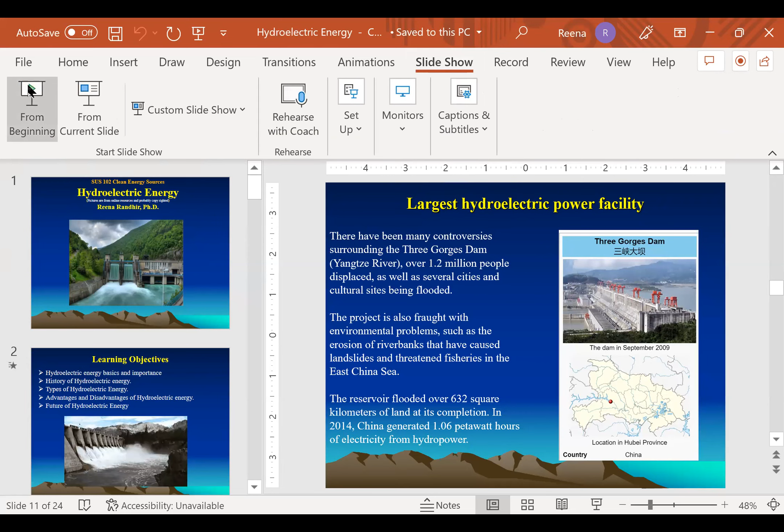Hello, everyone. Our objective today is to understand the importance of hydroelectric energy in the world. So the main learning objectives are to understand the basics of hydropower and its importance, a very brief history. We'll go over the different types of hydroelectric energy, the advantages and disadvantages, and also a brief overview of the hydroelectric energy.

What is hydropower or hydroelectric power? Hydro means water. So it is a form of renewable energy that uses water that is stored in a dam, or it can also be a flowing river that is used to create electricity that will be put in the electric grid. So this facility is called a hydropower plant.

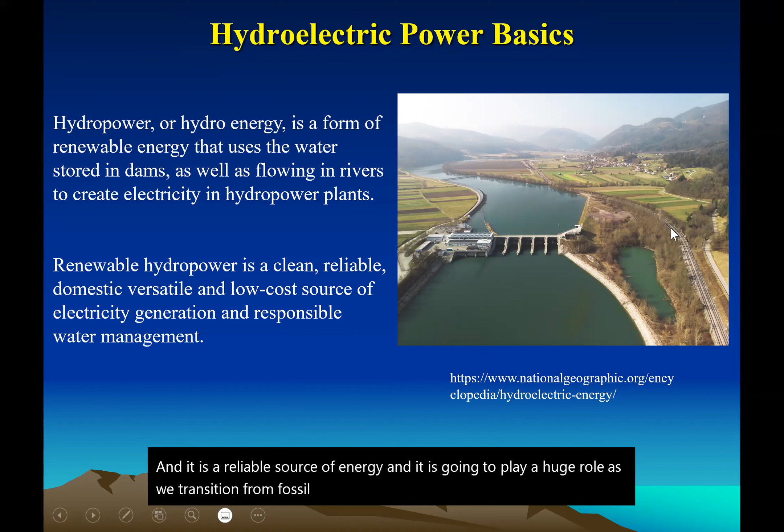Its significance is that it is very clean, reliable, it's domestic, versatile, and it is a reliable source of energy. And it is going to play a huge role as we transition from fossil fuels to clean energy fuels in the future to combat the climate crisis.

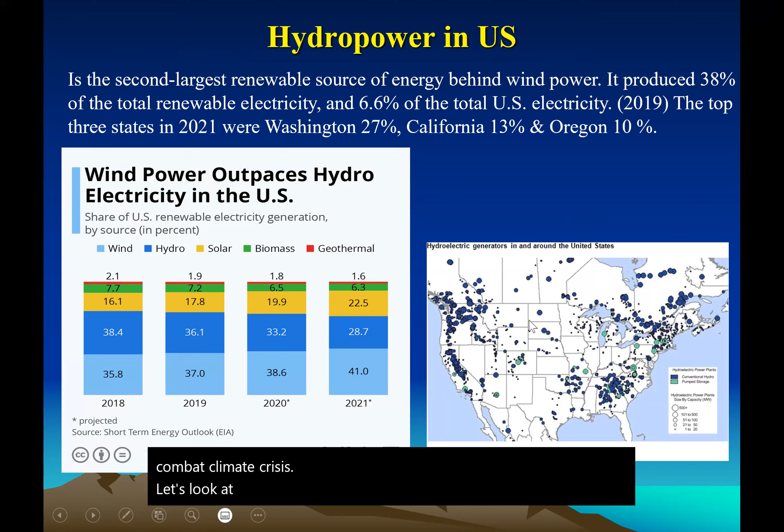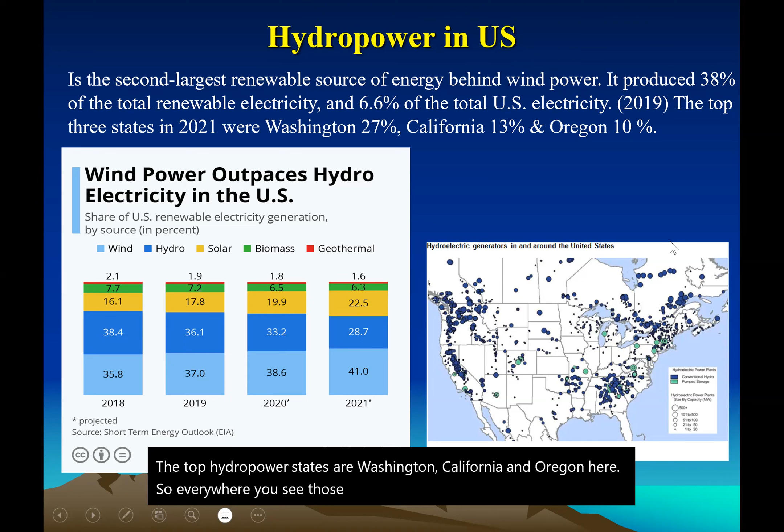Let's look at hydropower in the United States. In the USA, it is the second largest. Hydropower used to be the first 4 years ago; 38% of the renewable energy came from hydropower, but wind energy has recently taken over. So it produced about 38% of the total renewable electricity and 6% of the total US electricity. The top hydropower states are Washington, California, and Oregon here. So everywhere you see those blue bubbles is where hydropower is being made.

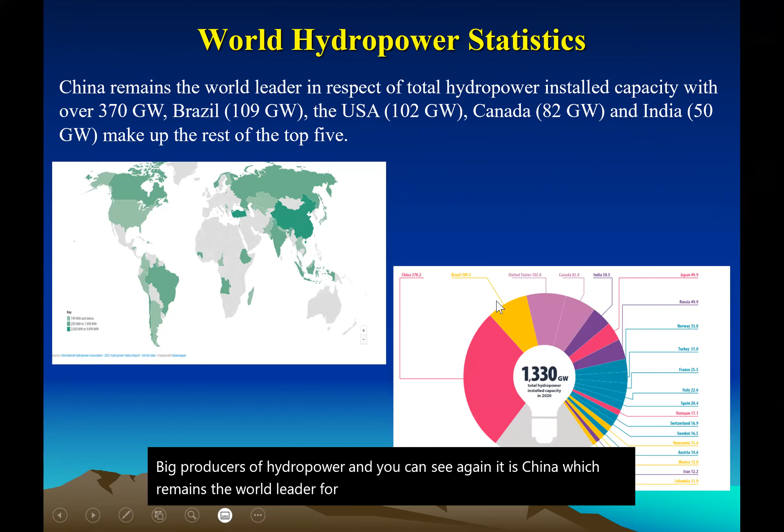In the world scene, all the countries that are shown in dark green are big producers of hydropower. And you can see again, it is China, which remains the world leader for installed capacity, followed by Brazil, USA, Canada, and India. You can see it in this pie chart here.

A brief history about hydropower. Water power has been used for thousands of years. The Greeks used it for grinding wheat into flour. In the 1700s, it was used for milling lumber and for pumping irrigation water. In 1878, the world's first hydroelectric power was developed by William Armstrong in England. In the USA, Appleton, Wisconsin became the first operational hydroelectric generation, producing 12.5 kilowatts that can feed up to 250 lights.

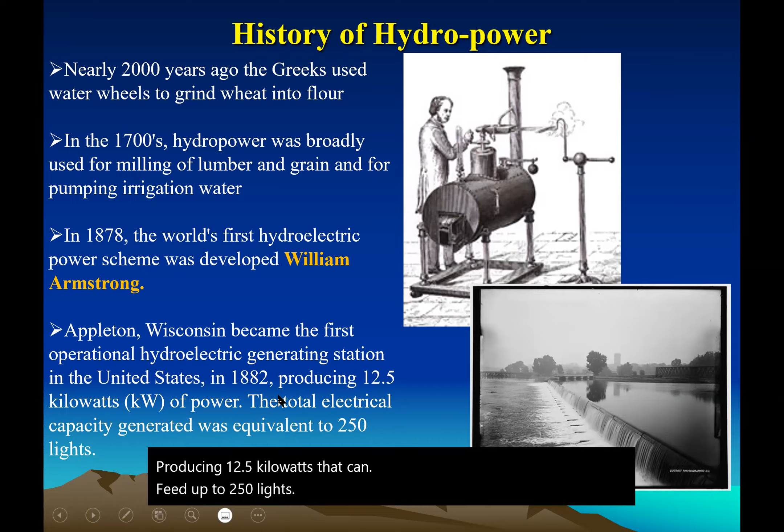So we call hydropower very renewable, sustainable and clean because it is dependent on the water cycle, which is natural. And the water cycle goes on and on. Here in this depiction, you can see how the sun propels the water cycle. So there's water evaporation from all the water bodies like lakes, rivers and oceans. And there's also transpiration, which is water loss from plants.

They condense around particles in the atmosphere. And when conditions are right, they come down as rain, precipitation, which can be stored, and the energy in water can be used to create electricity. So because the water cycle is very predictable and dependable, you can also say that the production is reliable, and it's also domestic.

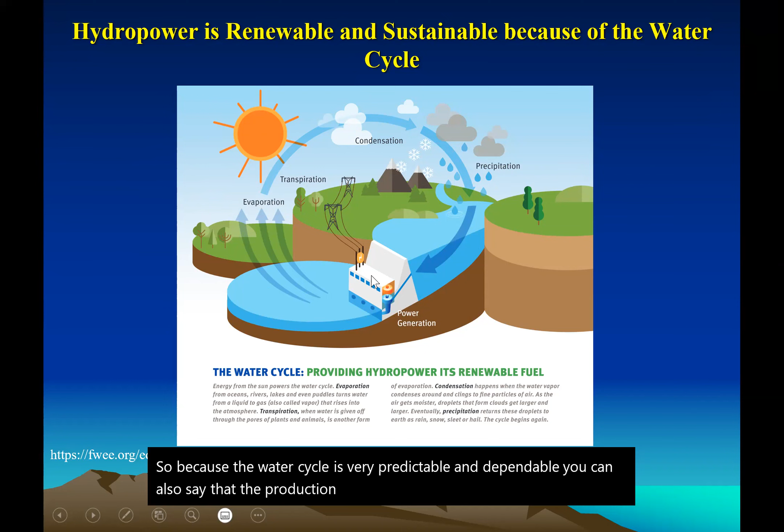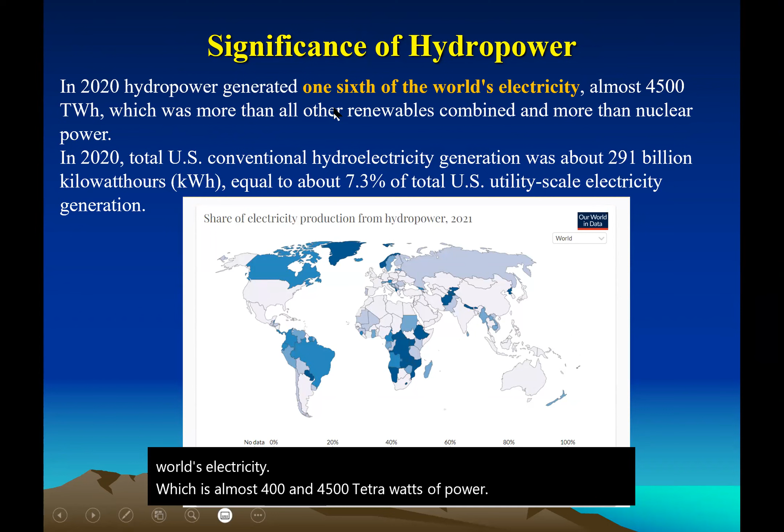So the main significance of hydropower is that in 2020, it produced a sixth of the world's electricity, almost 4,500 terawatt-hours, which is more than all the other renewable energy combined, and even more than nuclear. And here in the USA, it equals 7.3% of the total US energy generation. So this is very significant.

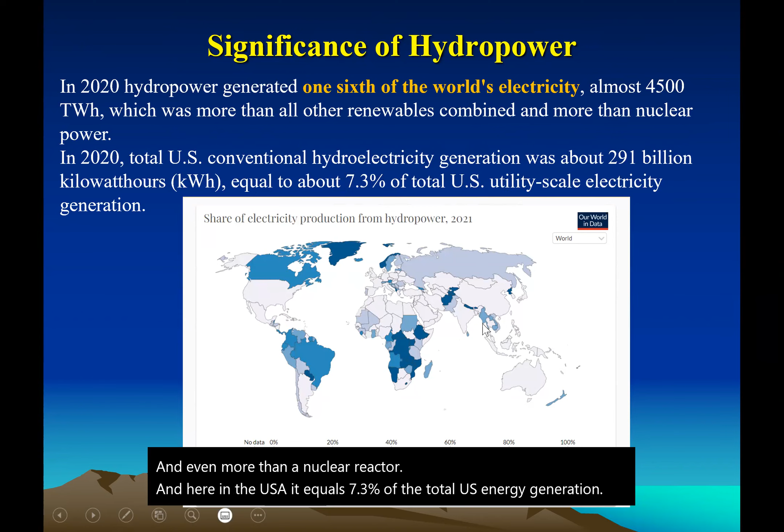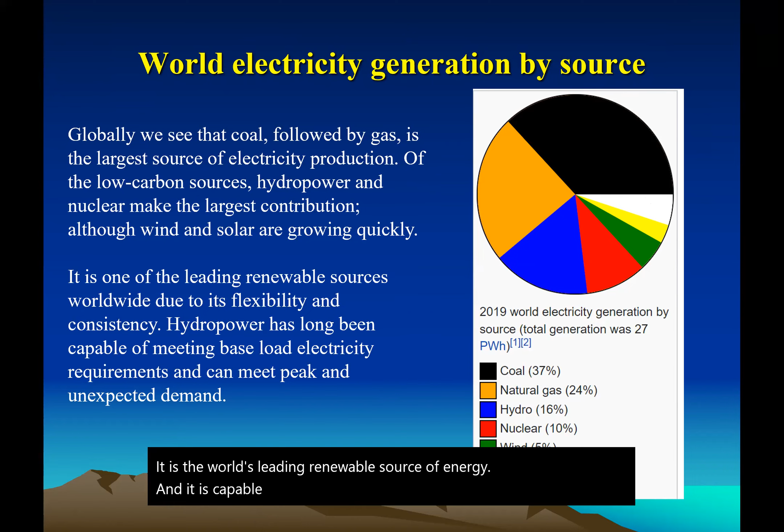So if you look at the world's generation of electricity by source, you can see the black region in the pie chart is coal, followed by natural gas, and here is hydropower, which is very commendable, at 16%. It is the world's leading renewable source of energy. And it is capable of meeting base load energy requirements.

However, there was a lot of controversy with this dam when it was built, because anytime you build a dam, you have to displace a lot of people. So this dam displaced over 1.2 million people. So several cities are actually buried here, drowned under the water. And there's also a lot of environmental problems that came into focus after this. It led to sedimentation and landslides in the area, apart from disrupting the ecology, the fisheries of the region.

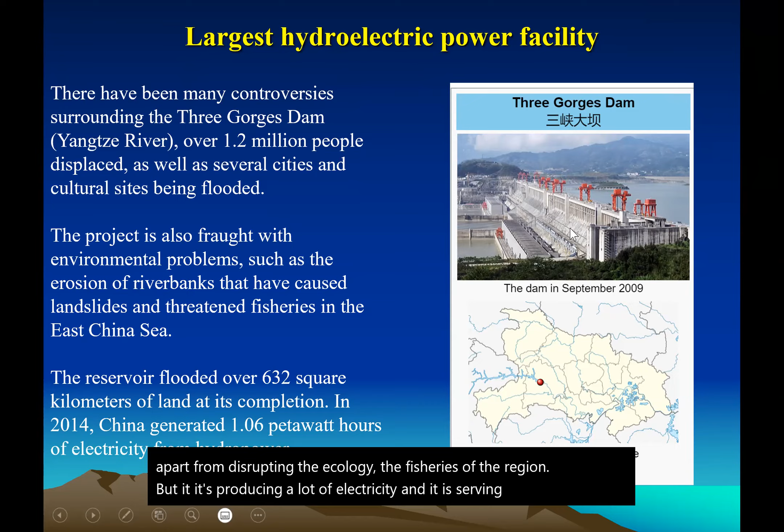And let's look at the physics of hydroelectric power. So any water, like stored water in a dam, has potential energy. And when it drops from a height, mainly because of gravity, sometimes we pump also. When it drops, it is converted to kinetic energy. And when it pushes the blade in a turbine, it becomes mechanical energy. And then the generator converts it to electrical energy. Very simple. Overall, the physics is very simple.

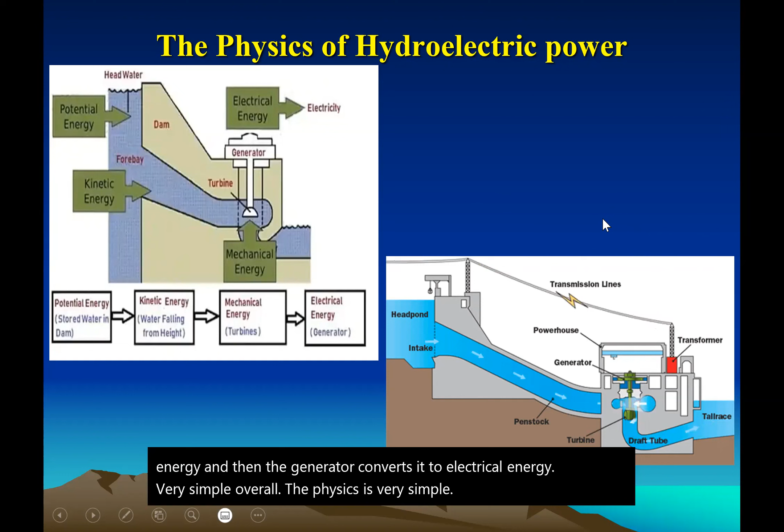So let's see how a hydroelectric power plant works. So here is a reservoir. We call it a dam where water is stored. Sometimes it's close to a natural dam, and many a time it is man-made. So this is where the cost is. It's very expensive to build a dam. And it can disrupt the normal human population and the wildlife population.

So when they open a gate, the water is going to move through a penstock, which is a tube that carries water to the turbines. So here, this is where it becomes kinetic energy. The turbine blades are turned by the force of the water, and it is rotating the turbines. The shaft here that goes to the generator will make electricity. And then the electricity is led to the electric grid here, and then it goes to power homes.

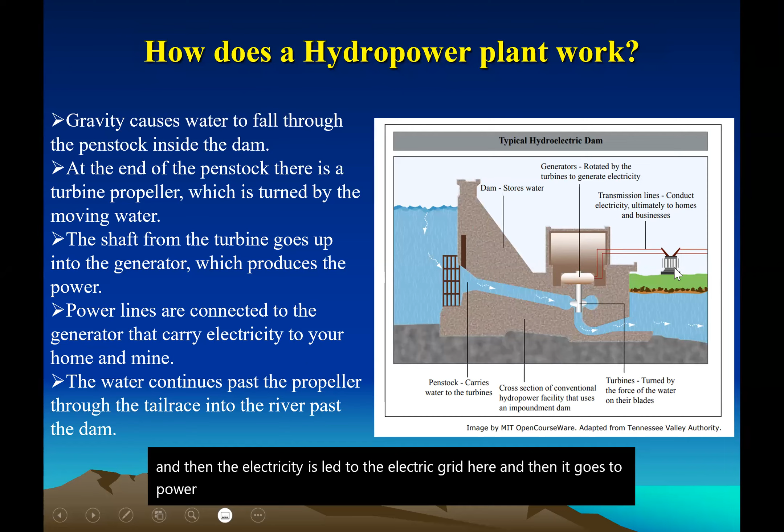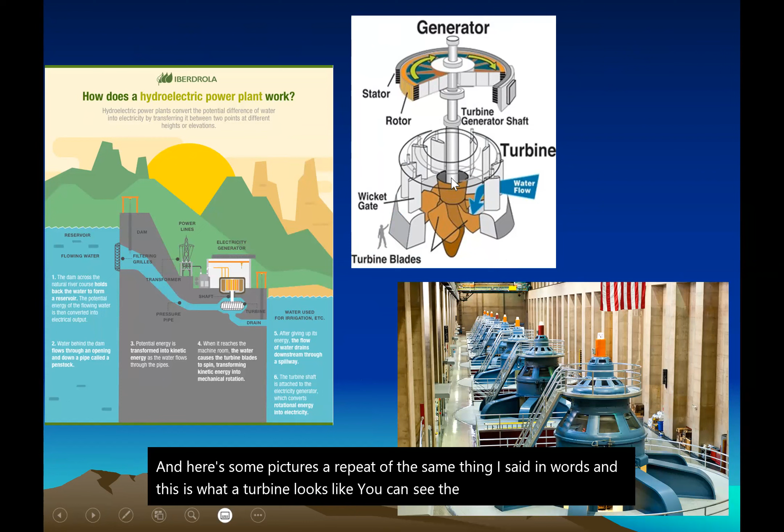And here's some pictures, a repeat of the same thing I said in words. And this is what a turbine looks like. You can see the turbine blades that will turn the shaft, and then the rotor and stator of the generator to produce electricity. And this is what it looks like from the outside. They're massive. So this looks like a huge dam.

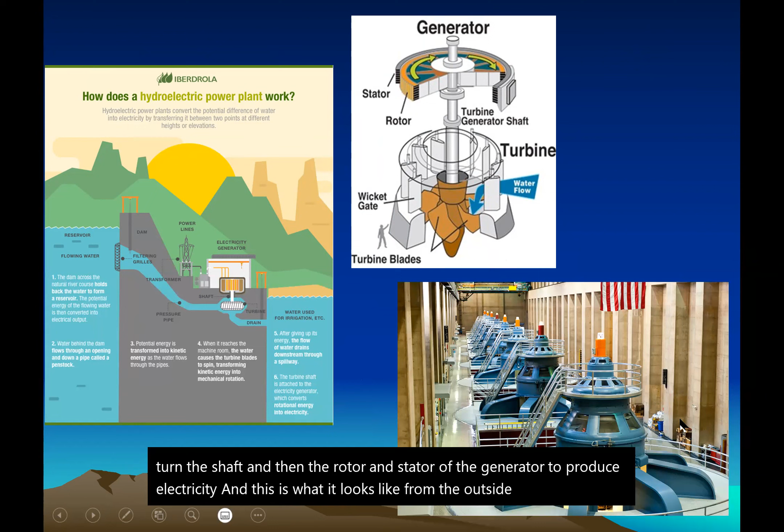So there are three types of hydroelectric power. It is classified based on installation capacity and the working head. When they say working head, they're talking about the height difference between the river flow and the outflow. So in a low head, the water head is below 30 meters. Medium head is 30 to 300 meters. And high head is 300 meters or higher. So the larger the working head, the larger the electricity generation. When water falls from a height, it has more power, thereby generating more electricity.

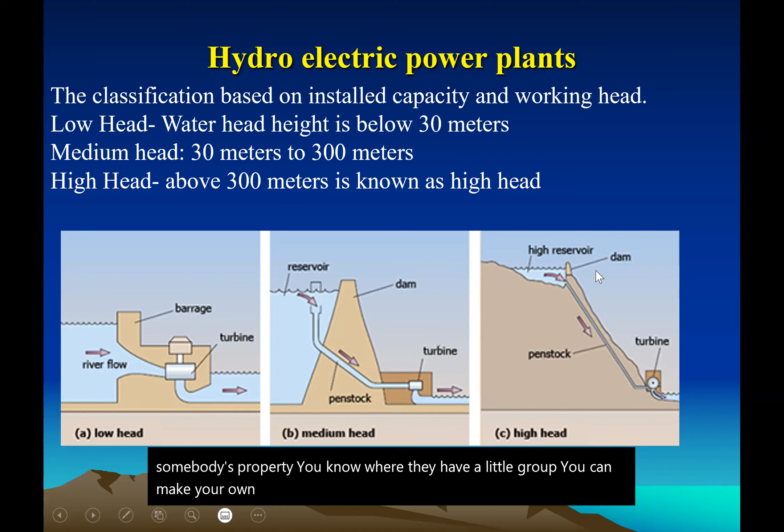So let's look at the three types of hydroelectric power. The first one is called impoundment. It's a reservoir. So here they have artificially created a reservoir. This is very useful when there is a topography like hills and mountains across the flow of the river. So here, we are using a dam with a reservoir, and they will open the control gate, and water will flow down the penstock to turn the blades in the turbine to make the electricity.

But when you think of a dam, it also plays a huge role in flood control, and recreation, and most times they have a fish ladder so that the fish can still migrate without affecting their migratory patterns. So this is called an impoundment. And this is capable of producing tremendous amounts of electricity.

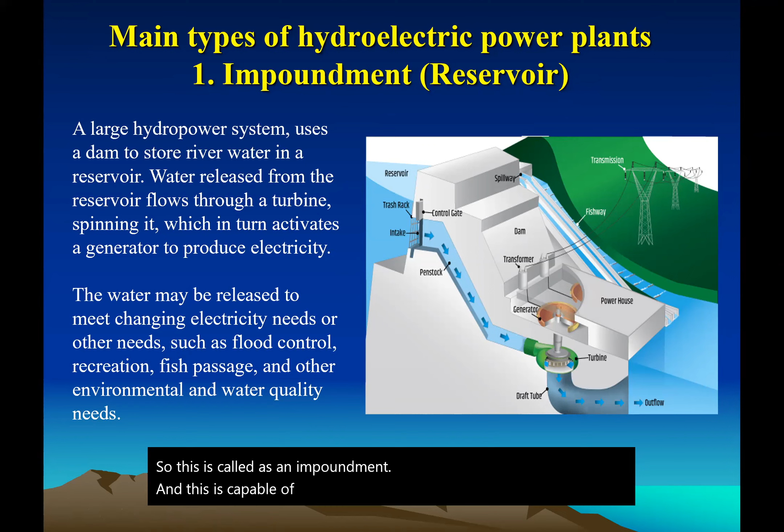The second one is diversion or run-of-river hydropower. So here we have a natural river. Because it's already flowing, there is a lot of kinetic energy here. So here we have a facility that will channel a portion of the river through a canal. You can compare it to a penstock that will turn the blades in a turbine, thereby creating electricity.

Sometimes the diversion is required. There are examples of where there's no diversion. So we are using the natural flow of river water, and we've created a facility in order to harness the kinetic energy of water.

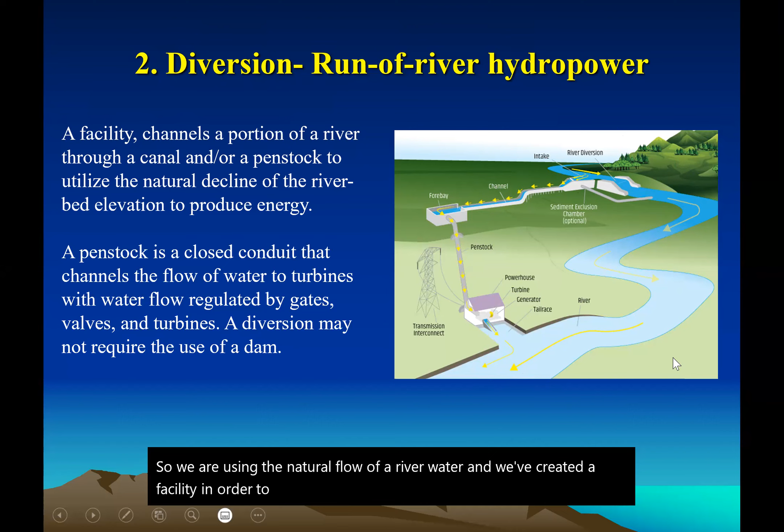It is projected this model is going to be the future, which is pump storage. So you can see it goes hand in hand with wind energy and solar energy. And you can see the PSH facility, pump storage hydropower. It can store electricity generated by solar energy, wind energy, even nuclear energy.

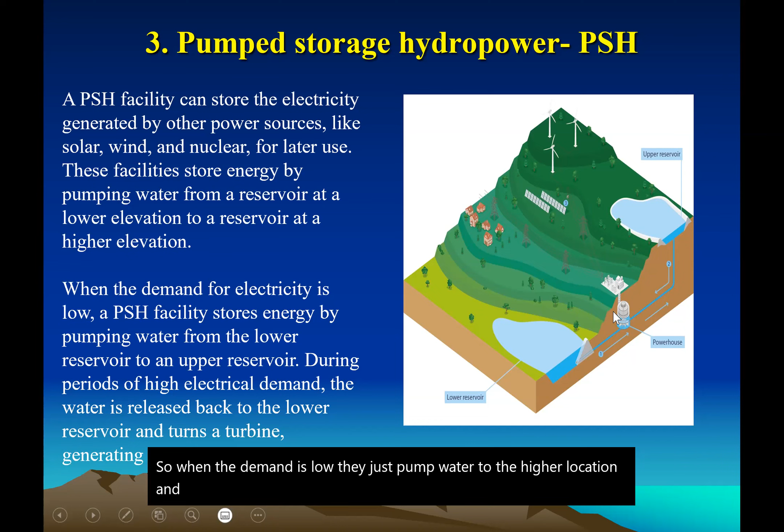And that energy can be used to pump water from a lower elevation to a higher elevation. It's called a lower reservoir to an upper reservoir. And depending on demand, they will open the penstock and generate more electricity. So when the demand is low, they just pump water to the higher location. And when demand is high, they will create electricity by opening the gates.

And here's the different sizes of dam. There's these massive, large hydropower. Department of Energy defines large hydropower plants with a capacity of more than 30 megawatts. And there's these little backyard ones, that's enough to power maybe a farm. So that's less than 100 kilowatts. No, this is small, that can power a community. And the micro is the one you can find in farms, like a private one.

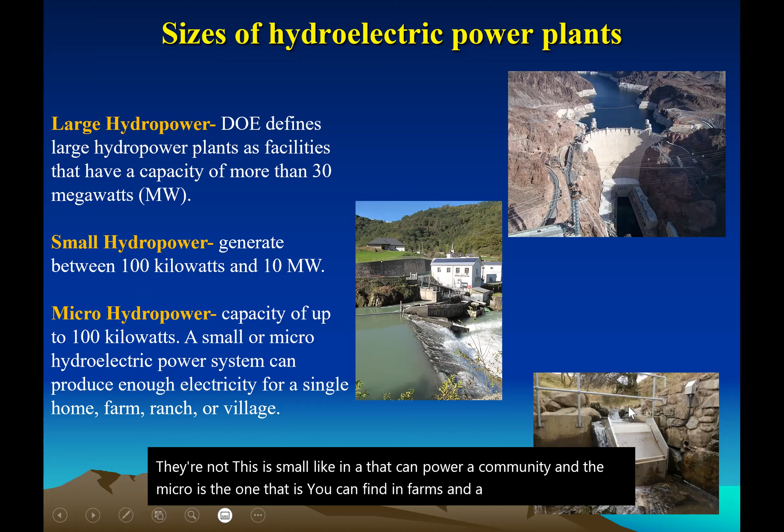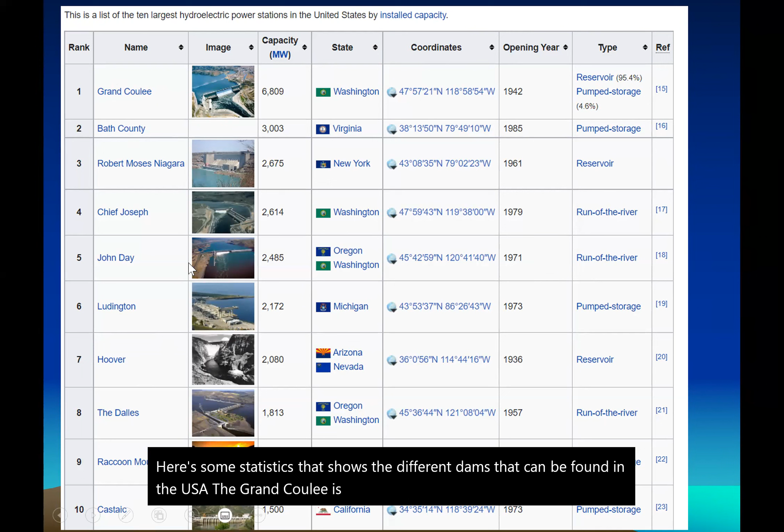Here's some statistics that show the different dams that can be found in the USA. The Grand Coulee is a famous one, and the Hoover Dam that was built in 1936. It's a very popular dam, and it's talking about the capacity and also the type of reservoirs. And by now you know what an impoundment or a reservoir is, what pump storage is, and what run-of-the-river is. So here this graph depicts the different types of dams that you can find.

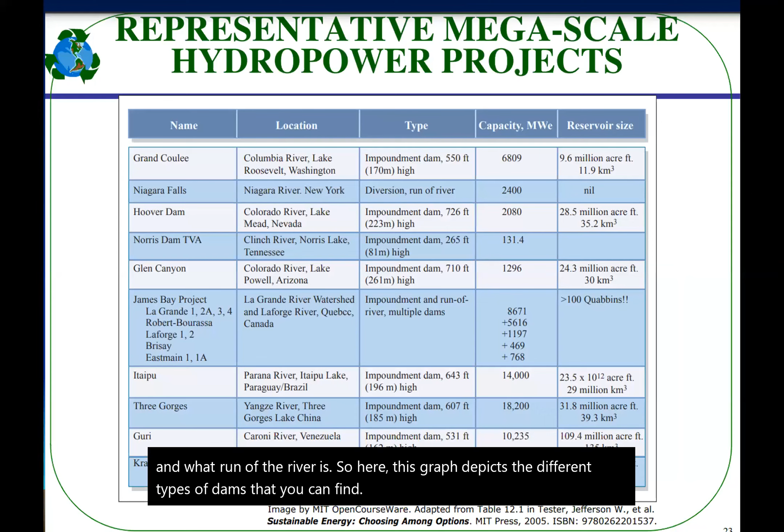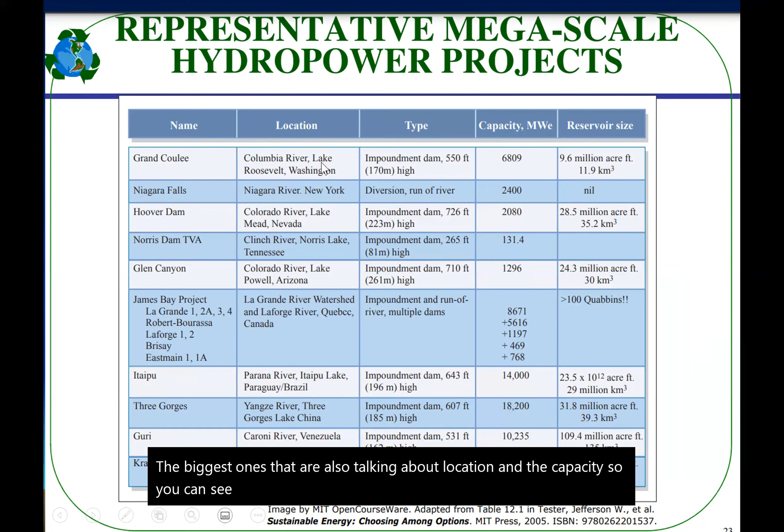And here's some of the biggest ones, also talking about location and the capacity. So you can see the Grand Coulee Dam on the Columbia River in Washington State is an impoundment type dam. And here's the capacity of the dam.

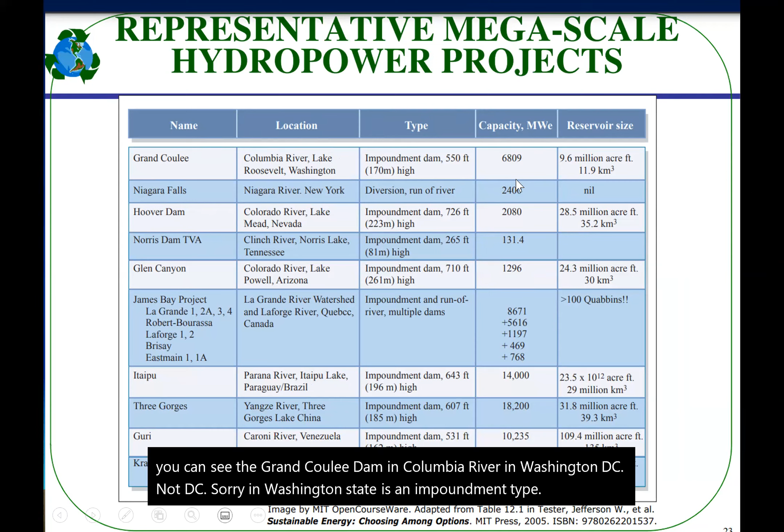So let's look at some of the advantages and disadvantages. First, it is very friendly to the environment. It's clean energy. It is emission-free. There's virtually no carbon dioxide, nitrous oxide, sulfur oxide, hydrocarbons, or any particulate pollution. It is renewable because it's following the water cycle. It's dependent on the water cycle. And one very important thing you have to note is its efficiency to create electricity is very high, 80 to 90% sometimes.

And it is dispatchable with scalable storage capacity. It has low operating cost and it has a long lifetime. So it is reliable, renewable, domestic. It's very environmentally friendly. Some of the negatives, as with most renewable energies, is the initial cost. Building a dam can go up to millions of dollars. And habitat loss, especially the fish, the wildlife, because it's going to occupy a lot of space. And people have to be displaced also. Social impacts of displacing indigenous people.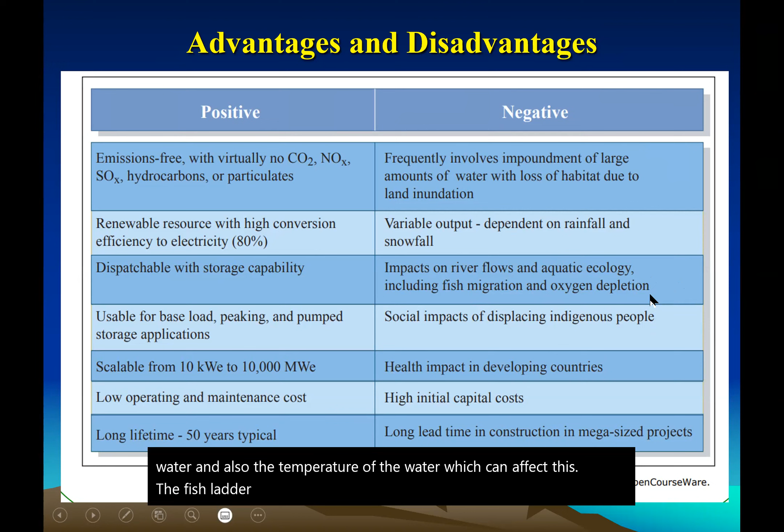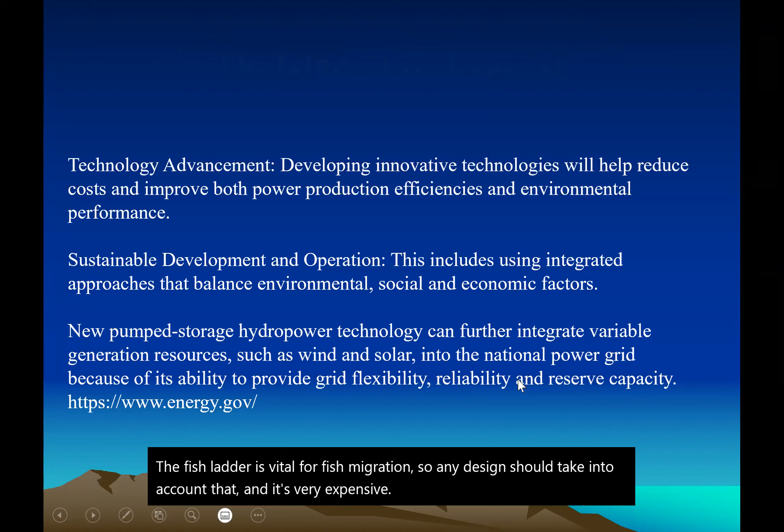And it can be dependent on the amount of rainfall and snowfall. It affects the ecosystem because it affects the oxygen content in the water and also the temperature of the water, which can affect fish populations. The fish ladder is vital for fish migration, so any design should take that into account. And it's very expensive. Again, more research and development is required in the future for hydroelectric power.

So in the future, the focus should be on technology advancement, where we are developing innovative technologies, and sustainable development and operation, where we take into account the effect on the environment, social and economic factors. It is projected that the new pumped storage hydropower, PSH, technology will further be used, like a collaboration of wind and solar energy and even nuclear energy. So they all work together to provide clean, reliable energy that can be put in the grid.